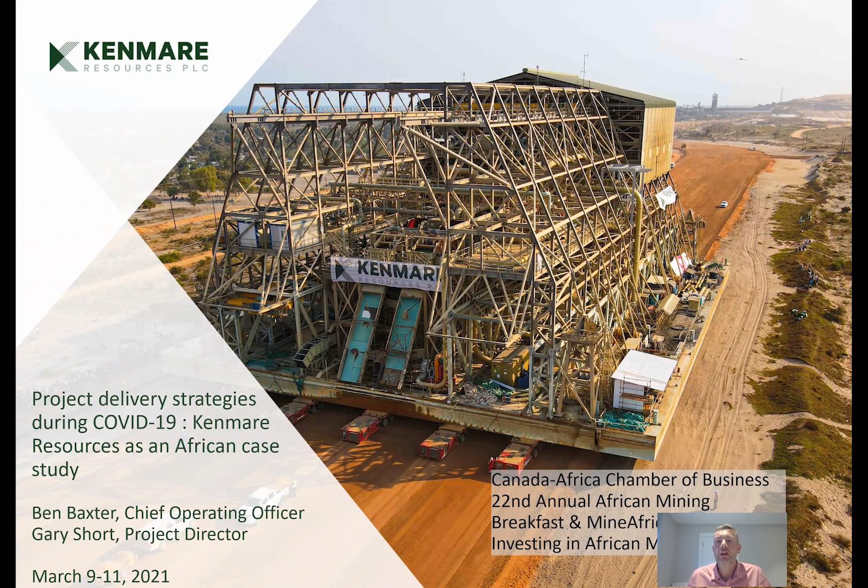Good morning. My name is Ben Baxter. I'm the COO of Kenmare Resources. I'm delighted to be making this presentation to you today, entitled Project Delivery Strategies During COVID-19: Kenmare Resources as an African Case Study.

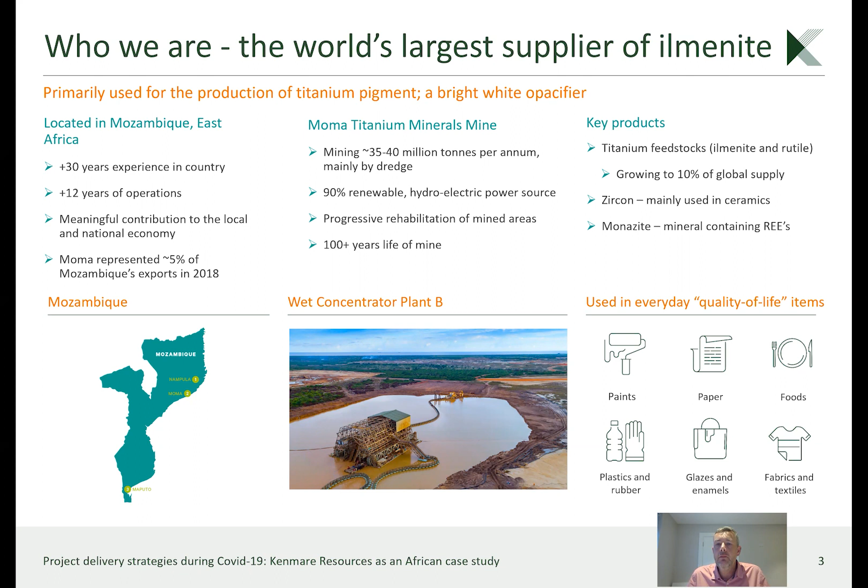Kenmare is the world's largest supplier of ilmenite, a mineral primarily used for the production of titanium pigment. We've been in Mozambique now for more than 30 years, mining up to 40 million tons of ore per annum, principally using the dredging method. Our key products are titanium feedstocks, mostly ilmenite but also rutile, and then we have other co-products of zircon and monazite.

Kenmare's strategy is built on three pillars: growth, margin expansion, and shareholder returns. We're targeting a first quartile industry position. We've been doing that through the delivery of development projects, which are now largely complete, and they are increasing our production, driving down our costs per ton, and positioning us for strong free cash flow generation.

The three core programs we've been working on: in 2018, the upgrade of the WCP B concentrator plant; in 2019, we built a new mining plant and dredge operation called WCP C; and in 2020, we've been focusing on the relocation of WCP B to a new high-grade mining area called Pilivili.

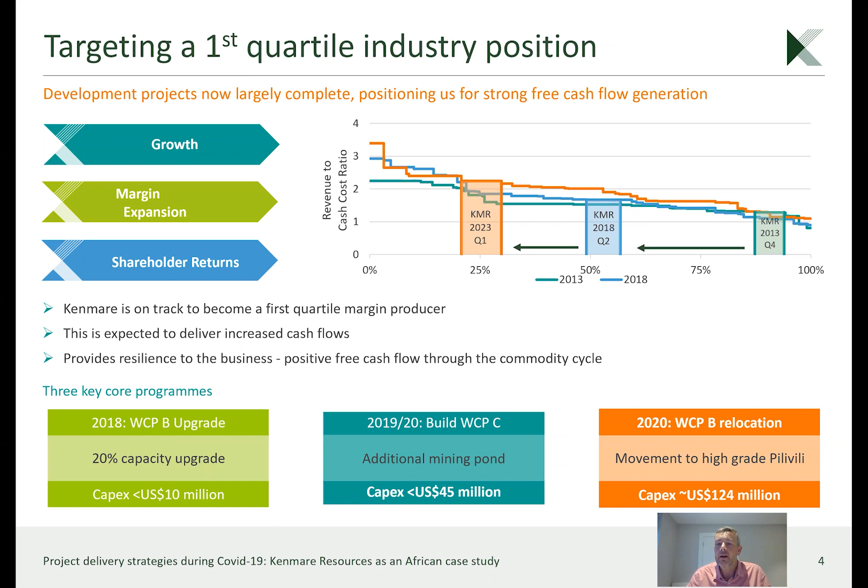I'm going to focus on the move of the WCP B mining plant. This has been the world's largest and heaviest move of an intact mining plant. It's 80 meters long, as wide as a football pitch, and as tall as a 7-story building. And it's been moved in one single piece.

The project scope was twofold: to relocate the dredge and this concentrator weighing 7,100 tons, but also to build all of the associated support infrastructure for a new mining plant in a new mining area called Pilivili.

Because WCP B provides around 50% of the feed to our mine, minimizing downtime was essential. And because the Namalope ore body was depleted, it was absolutely essential to make sure the schedule for this project was on time. We considered many ways to do this project, but determined that the use of self-propelled modular transporters, or SPMTs, was the best way because it provided the quickest solution and avoided us having to dismantle and re-erect the mining plant, which would have taken much longer.

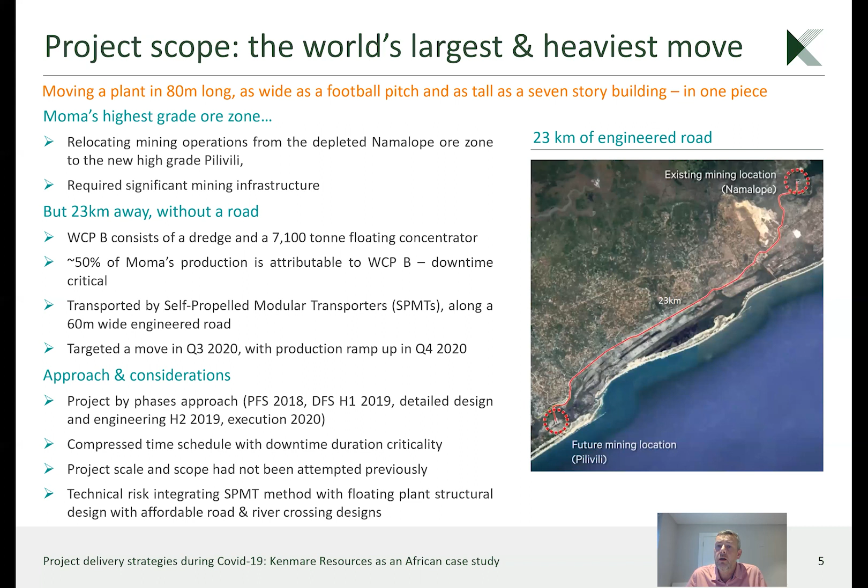Moving to slide 6: in Q1 2020, we experienced the rapidly developing challenge of COVID-19. We were in full swing with our critical path civil engineering on site, and we were at a critical stage of our contract development, with fabrication contracts taking place and being initiated all across the world.

We had to deliver a prompt response on site, to make sure we delivered on our highest priority of safety in the workplace, but also giving ourselves the best chance to deliver this project on time.

We did this through the implementation of additional sanitation and social distancing. We introduced mandatory travel isolations and built and initiated a testing facility at the mine. One of the key areas of success was that we got early agreement with main contractors and our EPCM to have their site teams present for the whole contract.

We did this in light of rapid adaptation to the legislation that was changing as we were going along. Mozambique introduced a state of emergency, and there were progressive lockdowns across the world, particularly in South Africa, where we had a lot of fabrication taking place. This led to restrictions on the movement of people and goods.

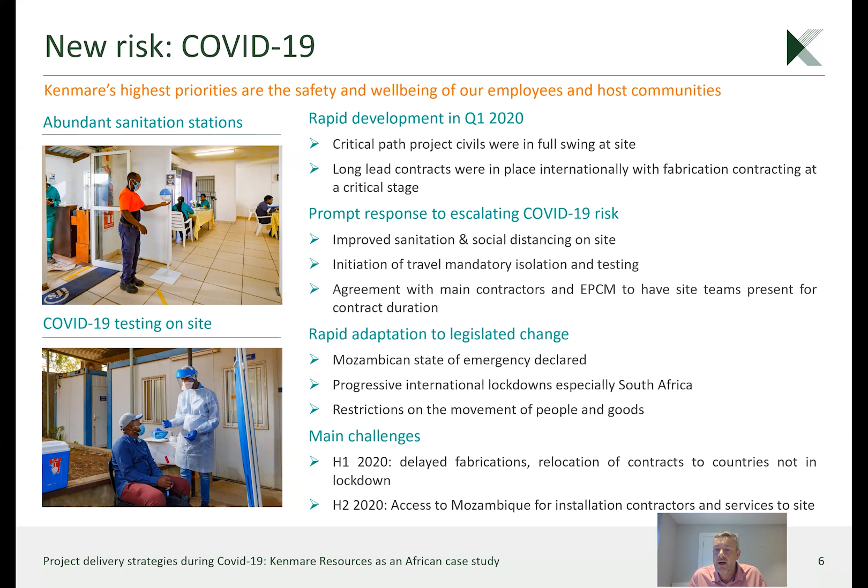In terms of mitigations for COVID, we had to be dynamic, and we had to follow an integrated project management approach. By integrated, I mean the integration of our owners team, our EPCM, and the contractors themselves. Communication was absolutely key, and having a detailed understanding of schedule compliance was critical, with multiple critical work streams assessed at any one time. The buy-in of the owners team, the EPCM, and the contractors was essential.

We found that we had a can-do attitude across all three of those groups. That allowed us to define alternative suppliers or subcontractors if required. It allowed us to refocus the project towards more in-country contractors as opposed to many South African contractors that had previously been expected. We even saw contractors supporting each other to ensure schedule compliance, reallocating scope between them according to the resources available on site at any one time.

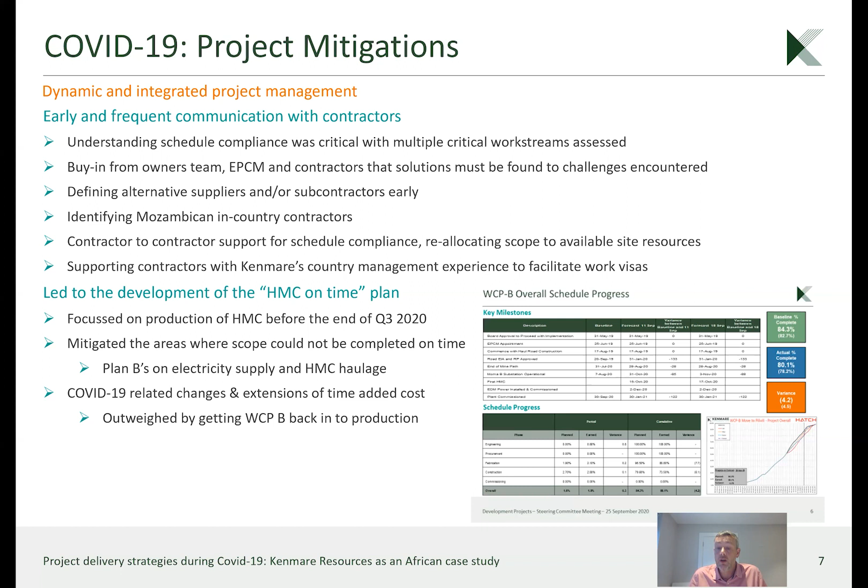It meant that we had to mitigate some areas where inevitably scope could not be completed on time. We developed Plan Bs for electricity supply and for HMC haulage. Inevitably, COVID-19 brought change, extensions of time, and added cost. But what we realized early was that those costs were outweighed by getting WCP B back into production quickly and on time.

There were many success factors to this project, but principally the main success factor was built around strong relationships. Our project team became extremely well integrated with the operations at Moma. We saw fantastic relationships driving through with our EPCM, particularly personnel who had been with us throughout a number of previous projects and over many years.

The dedication of the contractor group was fantastic, and you could really say they worked as partners and went the extra mile. Those relationships were really built around a good project management system and control.

We had a very prompt understanding of our schedule, our costs, and our risks, and we ran those schedules on a constant basis. Our governance structure was efficient, allowing the project team to meet the exco of the company on a weekly basis. That meant decisions were fast, and we were able to give the project team direction and the ability to move forwards with the project without delay.

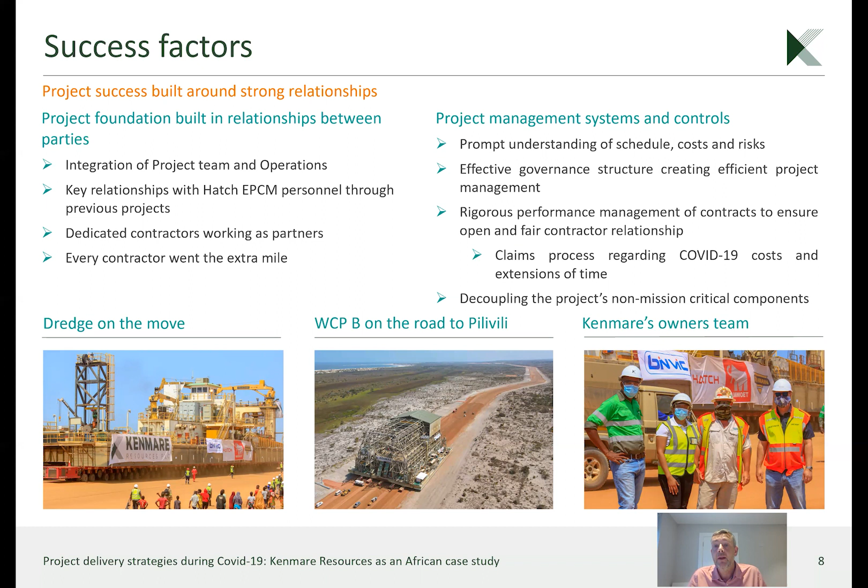The last benefit was the decoupling of the non-mission critical components. This allowed the project team to focus in on what was important. When we had to change scope and focus on HMC on time, the team knew what they had to do.

So this project has been delivered. Operations commenced on the 25th of October as per the plan, and in Q4 of last year we ramped up WCP B back to its normal production rates. Significant stocks of HMC were built by the end of the year, and that's now benefiting the downstream processing operations.

Our plan Bs were successful, and we made our transition to grid power in December 2020, and HMC haulage continues pending completion of the HMC pipeline.

I think it's really important at this point to say a huge congratulations and thank you to our owners team, to Hatch, and all those key contractors who helped deliver this project. And it was truly under hugely dynamic circumstances.

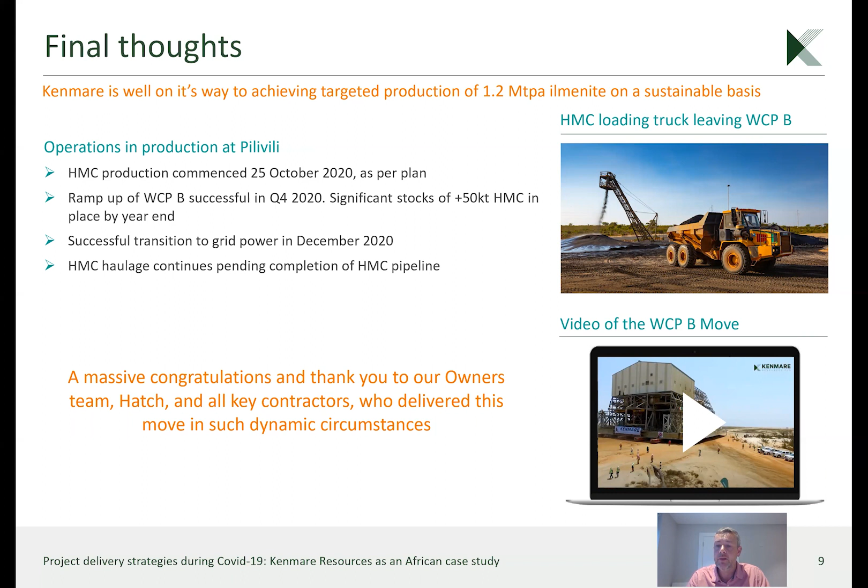I'd like to share with you a 2-minute video to explain more greatly how this project was completed.